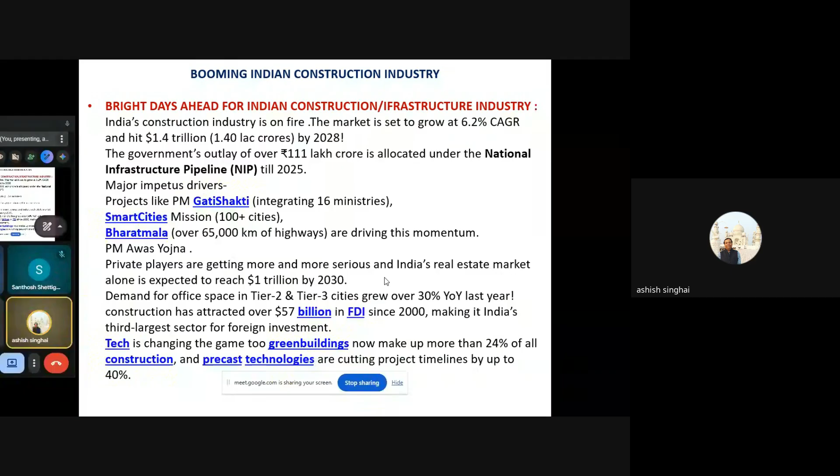So these are a couple of very green shoots in the Indian infrastructure industry, which is compelling Indian cement manufacturers, steel manufacturers, the construction industry, structural designers, and the overall ecosystem of construction to think very seriously on the impact of this humongous construction which is happening. LC3, the very latest introduction in our construction industry, needs serious thought, and it very much supports the sustainable objective.

Now, when we talk of sustainable development, what does that mean? Sustainable development meets the needs of the present without compromising the ability of future generations to meet their own needs. So you continue to construct, you continue to build infrastructure, buildings, whatnot, but ensure that future generations, maybe 20, 50, 100, 150 years down the line, will also have material left for further construction. This is what sustainable development is all about.

And sustainability is definitely always local. You need to learn, you need to devise technologies where local materials can be used to the maximum instead of importing designs, technologies, products, or materials. Local material is always sustainable.

This sustainability dimension stands on three large pillars: environment, society, and economy. Environment means conservation of resources, protection of the environment, and biodiversity preservation. Societal sustainability means energy and food security of humans, health services and security, and social equity and equanimity. The third is economy, meaning any construction has to have a broader focus on economy, so there has to be cost efficiency, profitability and growth, and valuation of services. These are the three broader pillars upon which sustainability is based.

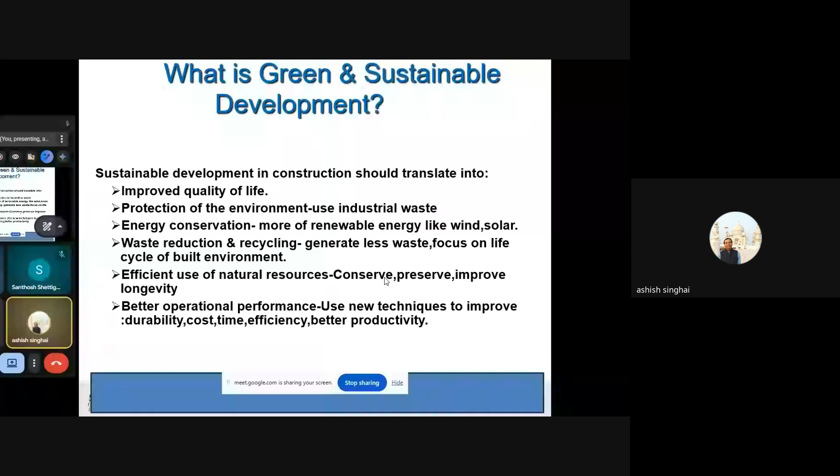So how does it help in sustainable buildings? As we say, more and more use of green materials, optimizing the demand for electricity, water, and natural resources, generating electricity and partially replacing it with renewable means. Instead of typical artificial lighting, coal-based thermal lighting, let's go for solar, hydel, or wind power. Catering to water demands through sustainable processes such as rainwater harvesting, treating and recycling wastewater, and bringing it back to use for humans.

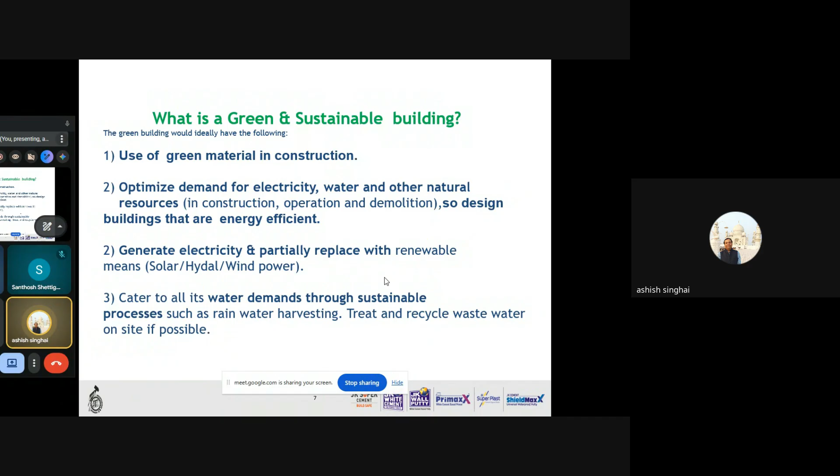So recycling and reuse of waste on the site, ensuring that all waste material is managed on the site itself, with no more additional material called to the sites, and generating optimum waste processed locally, like household waste segregation and disposal. Another new theme that has sprung up in the last couple of years is construction and demolition waste management. So not only do we have to reduce waste material, but even when waste happens because of demolition of a structure that might no longer be habitable, or when new infrastructure is coming up and we need to demolish structures, the entire demolished material can be recycled, and useful sand, aggregates, and material can be extracted and used for other purposes in the construction industry.

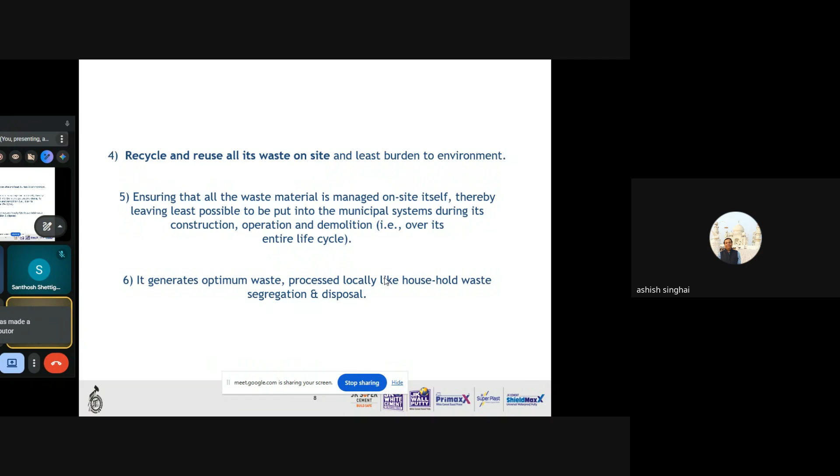So what is the industrial impact of the industry? As we discussed, our construction industry, which we are all part of, contributes almost 35 to 40% of the impact of carbon emission. So global carbon emission is contributed to the extent of more than one-third by our own construction industry, almost 30% by manufacturing industries, transport industries again almost one-third, and miscellaneous almost 10%. So the maximum out of all industries is our own construction industry.

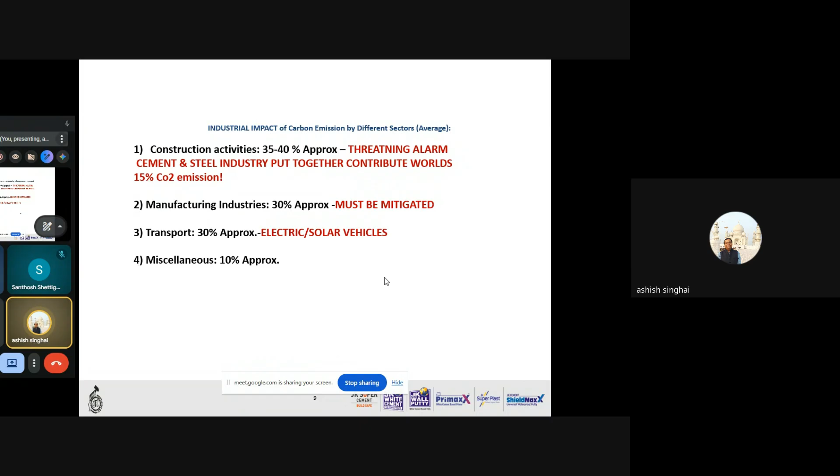We have to have a very strong focus on how to mitigate this threatening and alarming carbon dioxide emission. We've already discussed the sustainability impact a little bit, so I'll skip that. But this is something I need to focus on: the embodied energy of building materials. What is embodied energy? Why am I saying all this? Because that will reinforce the relevance of LC3 cement. So before that, we need to understand what is EBE, that is embodied energy of building materials.

Every single material which we use carries a certain amount of EBE in terms of the energy it has consumed. So which are the different dimensions where a product consumes energy? First is EBE, embodied energy, the amount of energy required in manufacturing a particular product, from mining or extraction of natural resources to the manufacturing process to transportation and finally product delivery. Put together, all the energy consumed makes the EBE of that particular product.

So energy is embedded in the materials. The more embodied energy a product has, the more carbon footprint it generates or emanates in the atmosphere. So ideally, any material with low EBE is good for us, for green buildings, for sustainable construction, etc. And if the EBE component is high, we need to think about that and devise an alternate to that particular high EBE product.

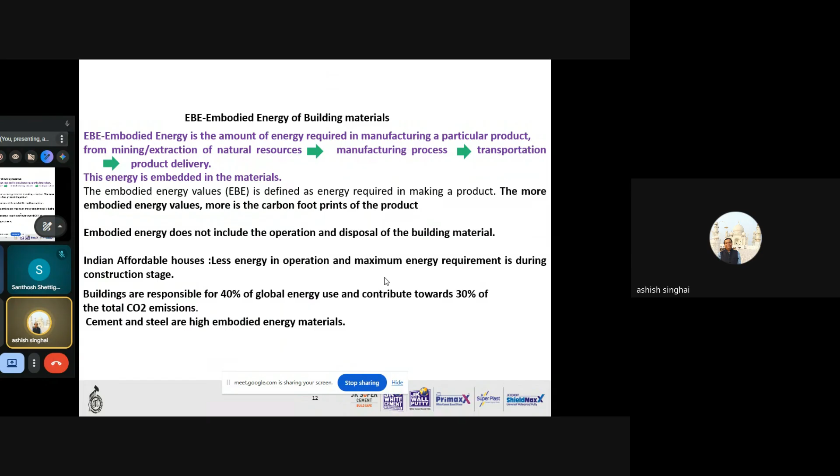Now, cement and steel, just look at that particular slide. Cement has almost 6.7 megajoules per kg. Steel is almost 5 times that, 32 megajoules per kg. So what we use in our construction industry as reinforcement steel bars has 32 megajoules per kg of EBE, which is phenomenally high. At the same time, acrylic paints are 61, aluminum is even higher than that, and plastic is almost 90 megajoules per kg. So these are all high EBE products.

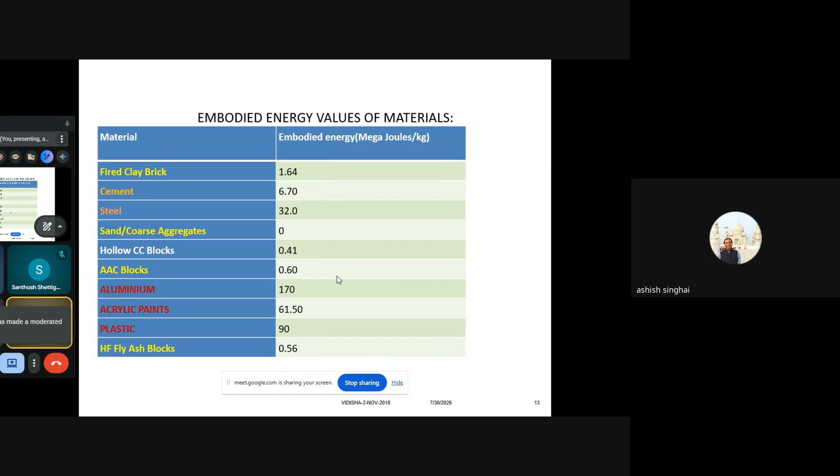At the same time, compare it with fired clay brick at 1.64, and look at the double AC block, that is aerated autoclave concrete blocks, it has only 0.6. So when comparing between a fired clay brick and double AC block, obviously we'll go for double AC blocks considering its low EBE composition. Or if we go for high fly ash volume blocks, it is almost 0.56, so almost equivalent to double AC block. That is a broad comparison as to which particular cement, steel, or block needs to be used based on the EBE it has.

Now, we cannot skip cement, we cannot skip steel, it has to be there, but there has to be judicious selection and judicious structure design wherein we can minimize the consumption of cement, reduce steel requirements, or possibly replace it with some befitting alternates. Just a broader look, the production of 1 cubic meter of concrete, with density of almost 2.5 tons, requires almost 2775 megajoules of energy. Cement has 6.7, steel has 32, fired clay is 1.64, double AC block is 0.6.

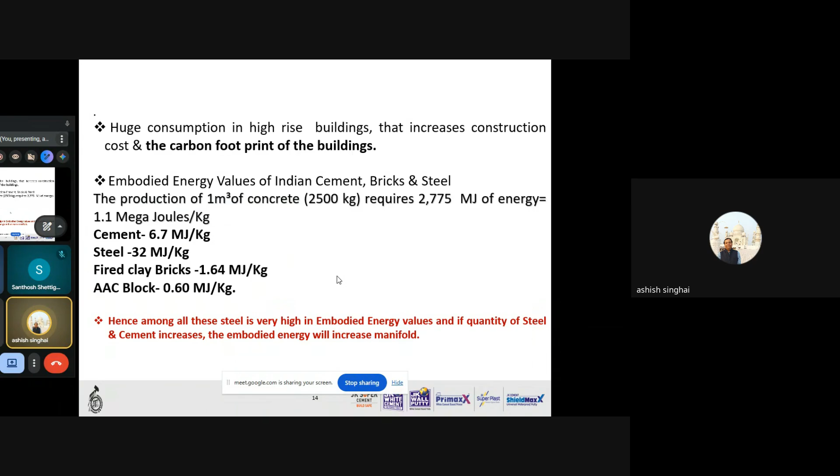So these figures very clearly indicate that EBE plays a very major role and determines how much carbon dioxide emission is emanated in the atmosphere because of using these materials. This is a global vision of decarbonization of the globe. The net zero carbon mission is almost 2050, by which the entire globe is committed to ensure that climatic changes are arrested and carbon dioxide emission is brought to almost zero, or net zero. That means the quantum of carbon dioxide we are emitting versus the quantum we are consuming and converting to meaningful applications. So net zero has to be there by 2050. This is the global objective.

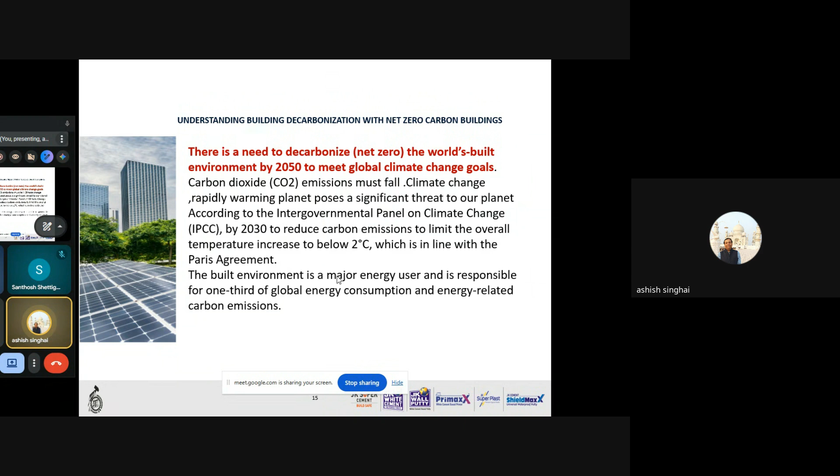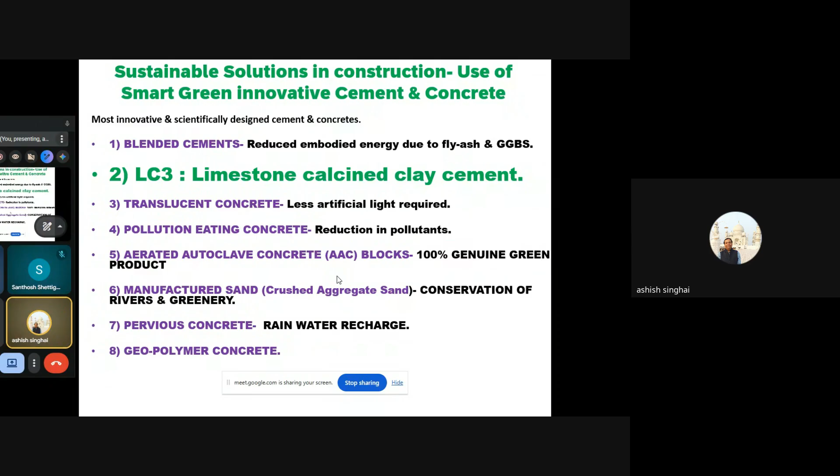Today's topic is LC3, so we'll talk more on this today.

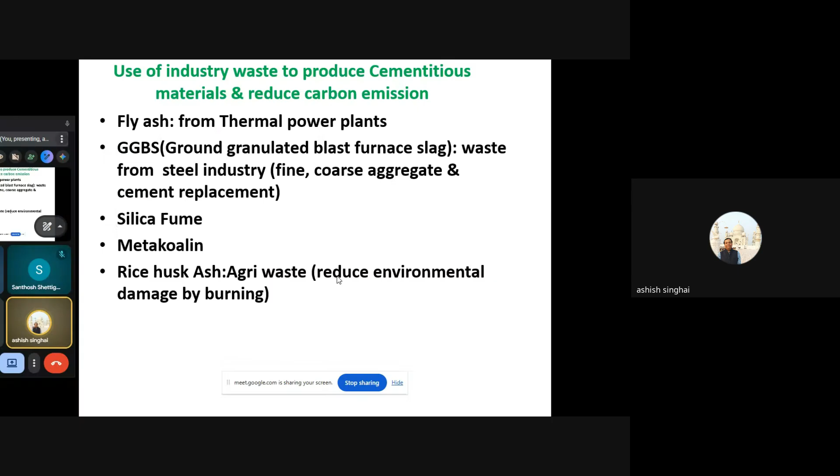As we know, industrial waste like fly ash, GGBS, silica fume, and metakaolin can be used by adding with cement and concrete, and significantly CO2 can be reduced. Every single ton of cement produces almost 0.8 to 0.9 tons of carbon dioxide gas that goes into the environment. So OPC has to be totally ignored, or possibly it has to be rejected at the sites, and only blended cements, LC3, or possibly geopolymer concrete has to be promoted. That gives a broader picture.

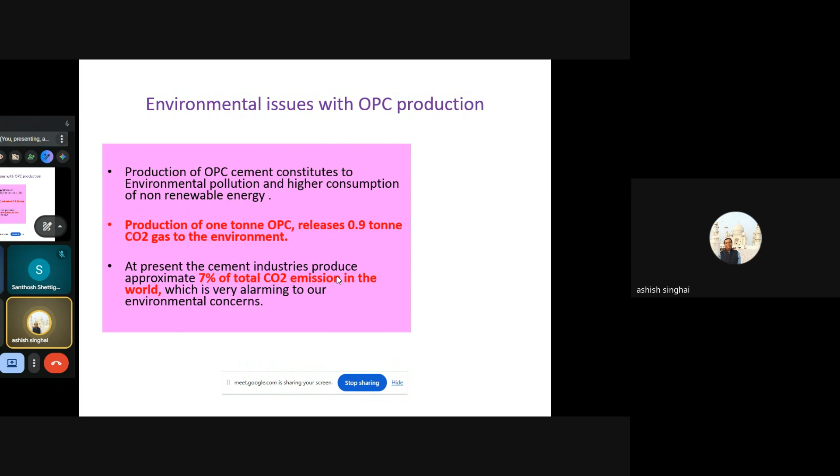Almost 7 to 8% of the total carbon dioxide emission is contributed by the cement industry, so it is in a way a culprit to the environment. But without cement, as we all know, no construction can take place. So we have to have a very, very focused approach on that.

Slag cement has the typical ability to reduce carbon dioxide emission by 45% as compared to OPC. In the same context, LC3 will also help us in the reduction of carbon dioxide emission to the extent of almost 42 to 45%. These are the certain figures that help us in making our choice towards either blended cement or LC3, or possibly towards geopolymer concrete, which doesn't have any OPC content as far as geopolymer concrete is concerned.

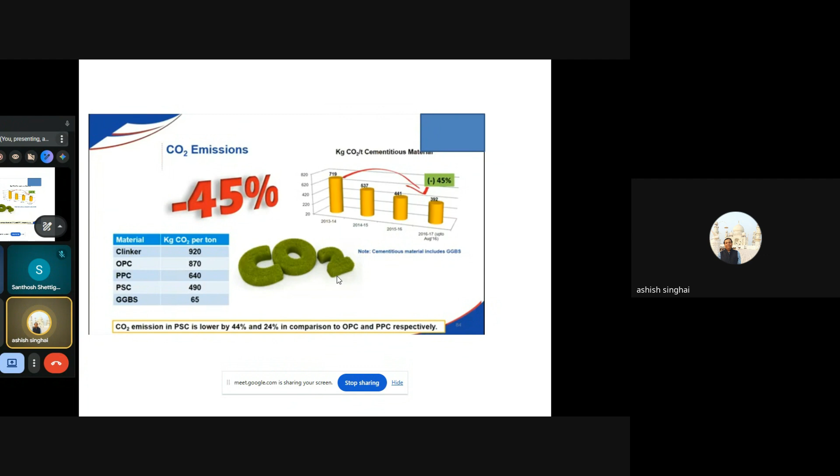Okay, so carrying on this, now let us start with the subject of the day, that is LC3. It is basically defined as limestone calcined clay cement, and it is sustainable. It emits low carbon dioxide and is a practically viable solution for the cement industry.

Now this is a broader outlay of this particular LC3 cement. Why LC3 has been introduced is what we are going to discuss in the subsequent slides. So what it is, how it is made, its composition.

First and foremost, 50% clinker is replaced. As we all know, clinker is one product which is calcined to the extent of 1450 degrees Celsius temperature. That particular powdered form of limestone gets into a flowable form, it melts, it flows, then it is quenched rapidly. So it becomes granular form, what we call clinkers. These clinkers are then ground to fine powder, and fly ash and gypsum powder are added with this particular composition, and that is how we get cement.

So clinkerization has been reduced to the extent of 50%. That itself says how much beneficial it is in terms of fuel optimization, in terms of lower clinkerization, in terms of reduction in the heat element. These are all the major benefits that LC3 encompasses. I will go in a more elaborate manner in the later slides.

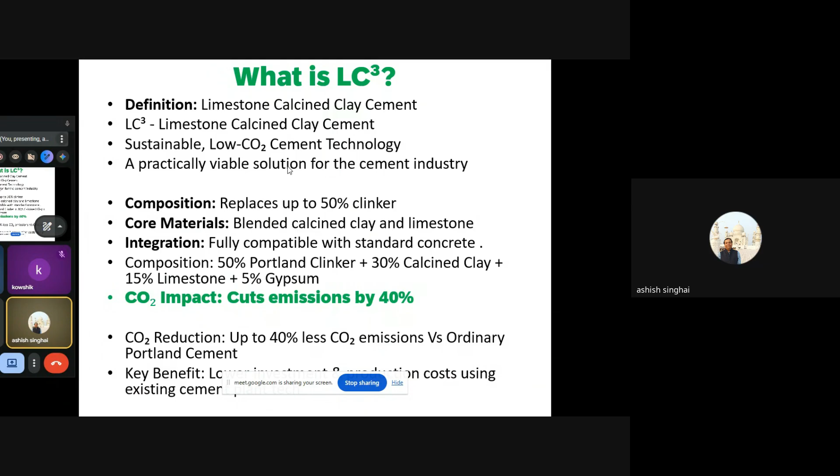Carbon dioxide impact is cut down by 40%. This is the beauty of LC3, and which is why it is being considered as one of the most sustainable cements, or in other words, a kind of green cement by the global construction industry. CO2 reduction is almost 40% less as compared to ordinary Portland cement, and as we know, it can be used for all kinds of existing cement applications.

Second one is coastal infrastructure, particularly meant for the southern part of India - bridges, ports, buildings near the sea face, sulfate attacks, or chloride penetration. LC3 cement's durability makes it better suitable than even some high-grade OPCs, or for that matter, much better comparable as compared to Portland slag cement as well.

Waterlogged zones in Assam, Bihar during monsoon, which we are already witnessing. Assam has witnessed one of the largest downpours in the last week or so, and so is the case with Bihar and other northern parts of India. So in Assam or Bihar during monsoon, water seepage is a huge challenge.

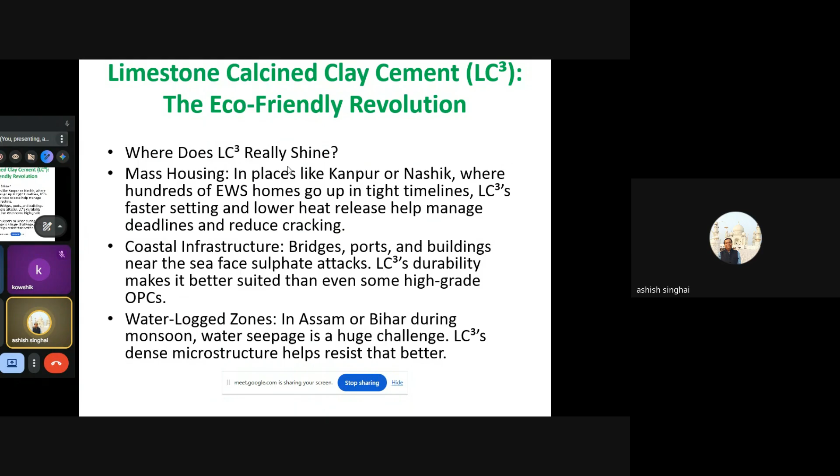LC3's dense microstructure helps resist that better, through better interlocking of the particles of calcined clay, limestone, and that 50% clinker, so that they intergrind in a much better way. The particle distribution is designed in such a way that once water is added to that cement, it becomes very cohesive with a denser microstructure, which prevents any possibility of leakages and seepages.

Now, what is holding it back? There are so many advantages with LC3 cement, so why is it held back? What are the deterrents? Like most innovations in our industry, LC3 is still working its way into the mainstream, and some of the reasons are familiar.

The first is contractors' reluctance. LC3 is a very recent innovation in the cement industry as far as India is concerned. So whenever a new product is introduced, the reluctance comes from the user community, the seller community, and the consultants also in a couple of instances. So I start with the contractor's reluctance.

Let us be honest, we have all heard someone say, 'Naya cement, risk nahi lena.' They are very much reluctant to take any risk with a new cement simply because it does not have any precedence, any previous record in their domain. So they will be reluctant to experiment with a new cement, saying, why should I take the risk when an equal number of better options are available in the market?

They wouldn't understand its technical superiority, its benefits, its sustainable objective. Possibly they will not have that kind of mindset to look into it. All they know is they will simply resist any new experimentation. So this is one thing.

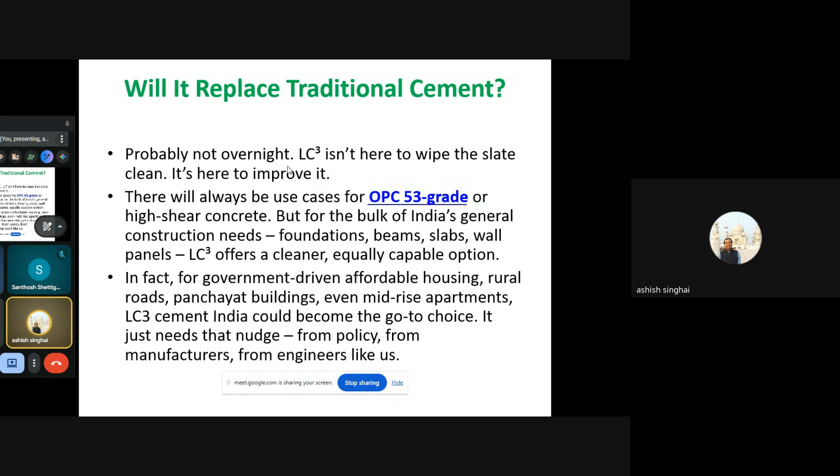Why does this matter to all of us? India is not slowing down, and it shouldn't. But as we rise, we owe it to the land beneath and the sky above to rise responsibly. LC3 gives us a way to do that quietly, efficiently, and affordably. That means we have all the more reason as civil engineers to give back to the industry.

So how can we give back to the industry, in a way that whatever cement or concrete I am making, let it have a lower quantum of carbon dioxide being emitted into the atmosphere? That is our social contribution by using such innovative cement, or possibly blended cement, or geopolymer concrete. It will make stronger homes, cleaner air, and a legacy for our kids that can breathe easier in.

Now, what are the basic raw materials? Just to understand the basic composition: it consists of kaolinite, which is basically what we call calcined clay, about 40 to 60%, ideally about 50%. It is calcined at about 700 to 800 degrees Celsius.

The second element is limestone, as low as 65% carbonate can be used, and no calcination is required. Limestone has almost 65% calcium carbonate, with different percentages depending on where it's mined, but almost 65% carbonate-containing limestone is the ideal raw material for LC3. It does not require any calcination — just mine it, grind it, convert it to powder, and add it.

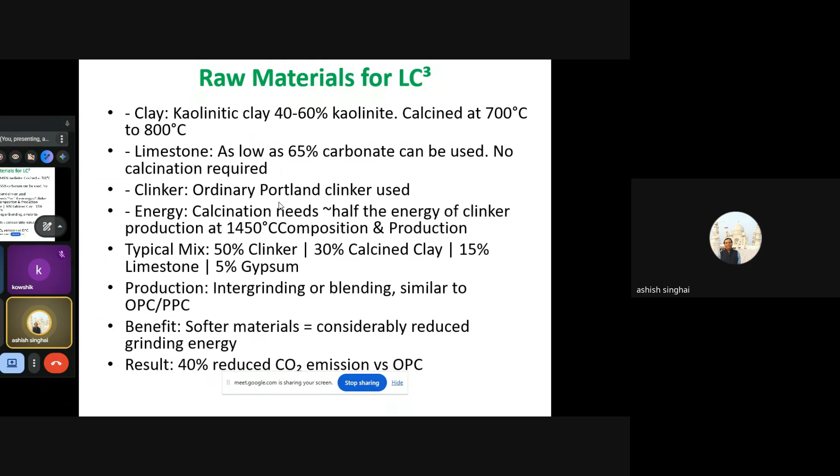Talking about results: 40% reduced carbon dioxide emission versus OPC. Now, what exactly is LC3 cement and how is it different from regular cement? As we've discussed, less CO2 makes it the most prominent cement among all available new option cements.

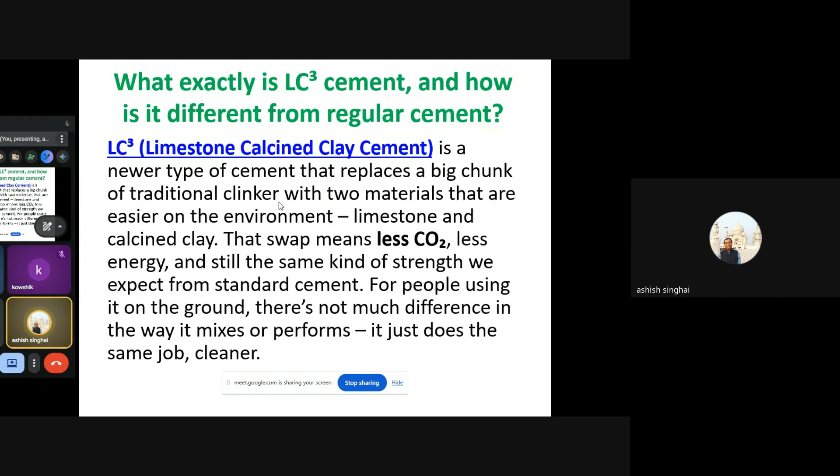Now, the need for low carbon cement: the cement industry contributes about 8% of CO2 emissions. So if we can reduce this component, we are helping nurture our Mother Earth for a larger number of years. The cause is limestone breakdown at high temperatures, which requires a lot of energy and emits a lot of carbon dioxide once the limestone is broken down. In this case, since everything is reduced significantly, the carbon dioxide emission will also reduce in the same proportion.

What are the drivers for this low carbon cement? Rapid urbanization, as we discussed. What is the solution? Reducing highly carbon-intensive clinker. In the case of LC3, how much is the clinker reduced? To the extent of 50% less as compared to OPC.

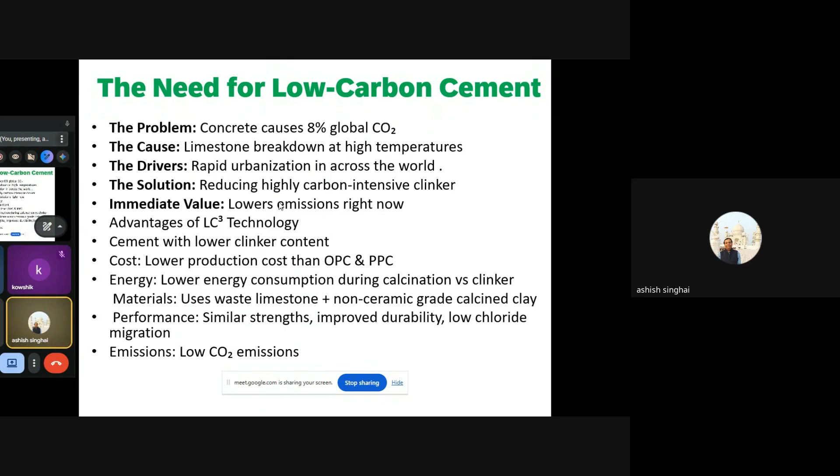Now, moving on to the next slide.

Raw material suitability: clay source. Kaolinitic, or calcined clay, is abundantly available. Purity level requirement is almost low, so 30 to 40% will do for us. It is a softer material. Reactivity test validated via standard R3 testing, which is an elaborate subject I'll possibly discuss in some other presentation.

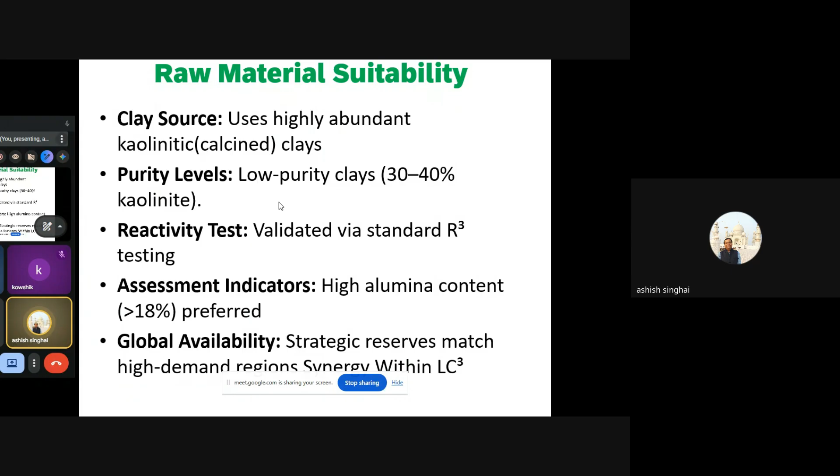Assessment indicators: high alumina content, more than 18%, is preferred. Global availability and strategic reserves match high demand regions, which is synergetic with LC3. So availability of raw material is pretty much abundant. No need to worry about abundancy, but we have to drive and channelize our energies in accepting this material as suitable for any structural construction or infrastructure projects. This is what is required.

As far as production and manufacturing is concerned, it requires only 800 degrees Celsius compared to clinker, which requires 1450, twice that. Kiln methods are almost the same, rotary kiln or flash calciner, being used in today's cement industry. So no separate equipment is required. Milling options: co-grinding or separate stream milling. Again, it is an existing system in all cement organizations, so no separate machines are required.

Efficiency boosters: surface additives to optimize dispersion can be used if somebody wants additional additives added to optimize the dispersion of materials. Plant adaptability requires zero machinery reinvestment, meaning with the existing setup, you can produce and manufacture LC3 cement.

And what is the result? Denser microstructure, improved strength and durability. Because of the three different elements ground finely, the microstructure of the cement becomes so fine and densely integrated with each other that, talking about the concrete, strength is increased because of better cohesion and better interlocking particles in between, and hence durability is also improved.

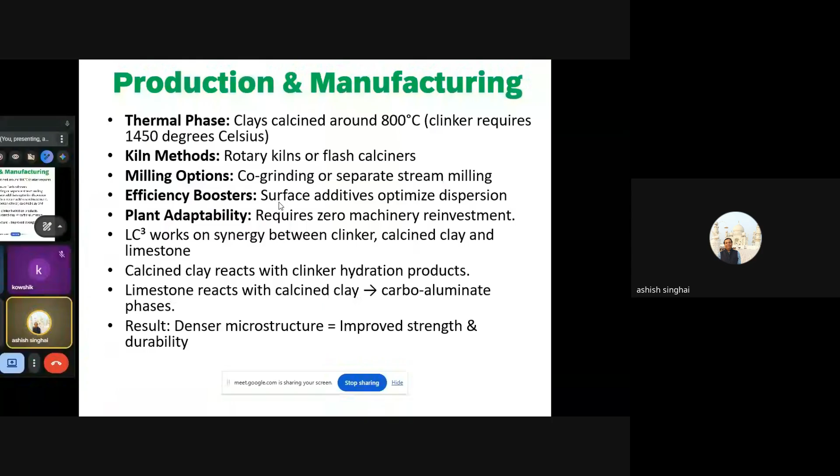What are the properties of fresh concrete made with LC3? First is rheological behavior: identical performance to traditional OPC, PPC or PSC, almost the same, but admixture match matters. Whatever compatibility test we do with typical OPC, PPC or PSC, the same kind of compatibility test with admixtures and LC3 has to be adopted in the same manner. No other technology needed. Setting control is easily managed with simple retarders.

Cohesiveness: superior anti-segregation and low bleeding due to better constituent mix. The three different materials are interground such that particle size distribution ensures the finally produced fresh concrete will have least amount of segregation and almost zero bleeding. This ensures our concrete has better packing, higher density, and hence better strength and durability.

And what are the special uses? It perfectly matches for self-compacting concrete. Why is it suitable for self-compacting concrete? Because of the finer ingredients and finer particle size distribution. So the concrete produced with the use of very good quality admixtures, possibly PC based, will flow in itself and doesn't require compaction - it will be like a self-compacting concrete.

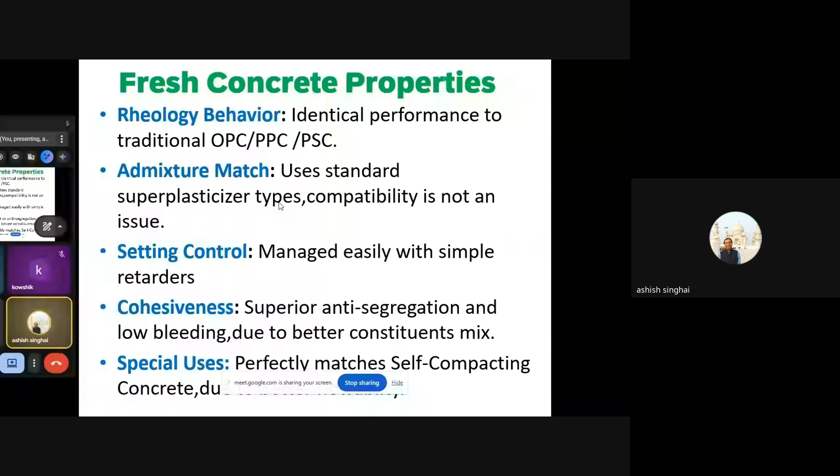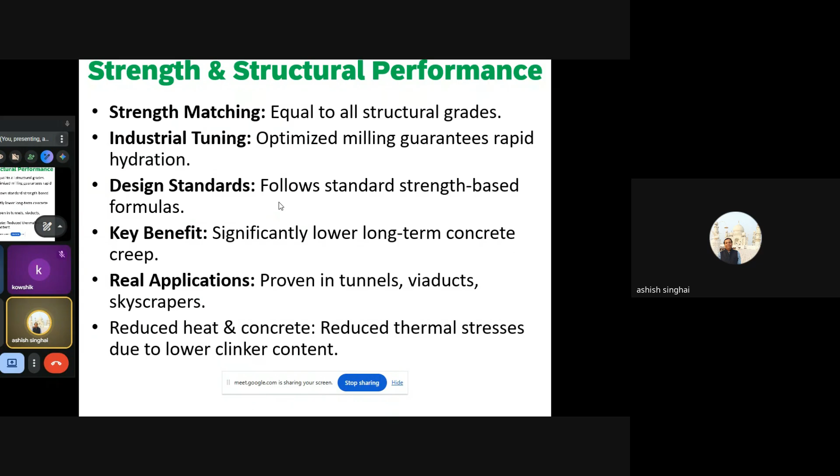Key benefits: significantly lower long-term concrete creep. These are all benefits already seen in real applications, proven in tunnels, viaducts, skyscrapers. Reduced heat in concrete because clinker percentage has gone down so significantly that consequent heat, or thermal stresses, are also very, very low.

Durability: it has very strong resistance to chloride infusion, which protects the steel. It generates a very good passivation layer around your steel reinforcement. Hence corrosion progression is reduced significantly, and we have longer concrete durability - steel protection, as we say.

A very important function we always ignore in most big infrastructure projects is ASR. We always test cement and admixtures, even steel is tested phenomenally, but the one thing that remains ignored is ASR - that is the aggregates, coarse and fine aggregate. They are not tested chemically to that extent, but these coarse and fine aggregates also have some kind of chemical infusions, and when integrated with concrete for manufacturing, their impact comes into play. We observe alkali-silica reaction in the form of prevalent cracks appearing on the surface, sometimes going deeper into the concrete and possibly damaging the embedded reinforcement. So ASR is a very, very important function which we need to pay attention to more often than not.

It is generally what I've observed along my career, that it is not given that much importance, but it has to be given.

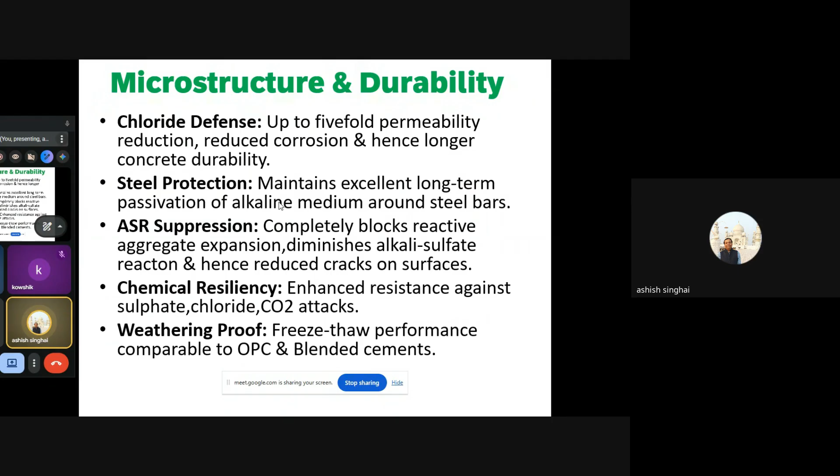Chemical resilience: enhanced resistance against sulfate, chloride, and carbon dioxide attack. This will make your concrete durable and weathering proof, with good freeze-thaw performance in areas where temperature goes as low as -10 to -15 degrees Celsius. It is comparable to OPC and blended cements. So these are a couple of advantages.

Talking about mechanical and physical properties, it has a strength which can be matched with any OPC or blended cement. Workability-wise, because of a very fine structure, it gives very good flowability, wonderful cohesion, good amount of packing, and it prevents segregation and bleeding also.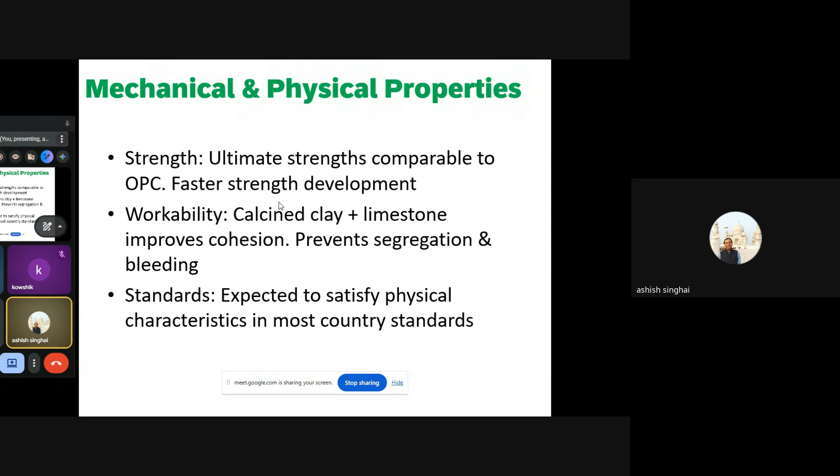Talking about economic viability, people might think production of LC3 requires a huge amount of capex, but it doesn't. It's considerably lower than new clinker lines, so the capex saving we already have. On OPEX, lower fuel requirements save up to 750 rupees per ton.

As we studied in the previous slides, in terms of traditional cement, the temperature required for calcination of the typical limestone powder is 1450 degrees Celsius. Whereas in the case of LC3, the calcined clay requires only 700 to 800 degrees Celsius, almost 50% of the temperature required. So the lower temperature requirement means lower fuel requirement, which saves to the extent of 750 rupees a ton.

So if LC3 is manufactured by some company, the OPEX advantage is very much prevalent, and that makes the cement very, very economical as well.

National saving: how come? Lower clinker content has reduced precious coal consumption, so we are saving coal consumption to significantly higher proportions because of the lower temperature required. Carbon pricing saves almost 25 euro per ton under tax frameworks, and the tax framework applicable in other countries is equally applicable in our Indian context also.

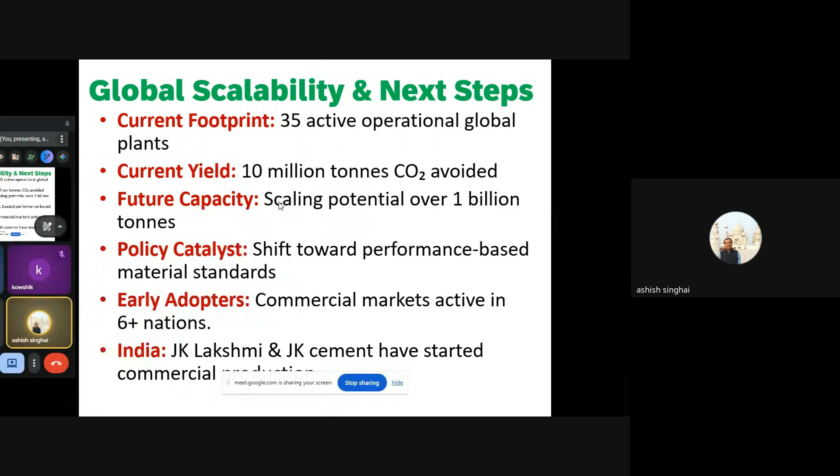So with this, I conclude this presentation. I hope I could meet the timeline.

Kowshik sir? Yes, sir. Yes, sir. Very nice.

Nandakumar, can you pick up some questions which are raised? Nandakumar, you are online? Nandakumar, are you online? Can you pick up some questions asked by the audience?